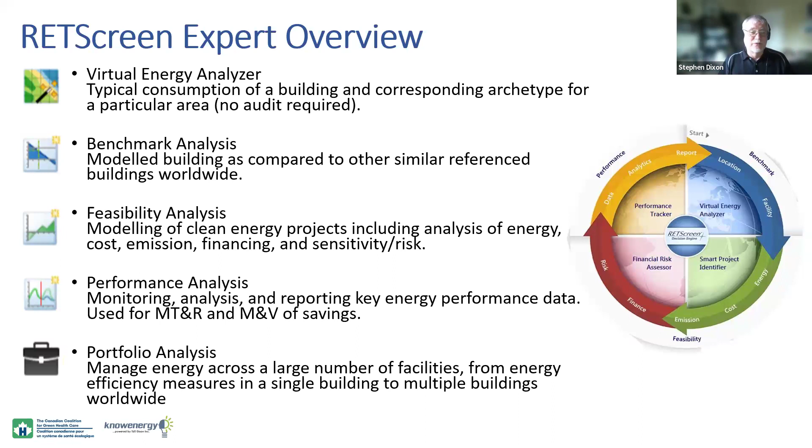So to engage the staff in the process, allow the staff to see the benefits of what they're contributing to. So I think that's really important. And she'll explain to you how they're approaching energy management strategically in their organization. As I said before, the portfolio, if you have more than one building, a collection of buildings, it could be just a portfolio of projects within a building too. So there's many ways to use that portfolio piece.

You can use basically RETScreen to do project types, everything listed on the screen. I'm not going to read all these things. You can read these later. You'll get a copy of the slides. You'll see the recording. But you can even use it to decide whether you're going to...

Somebody said to me the other day, I've got a used car for sale. It's a hybrid, and so I sat down with RETScreen, put the used car in as the proposed case. I put in my existing used car as the base case, and I evaluated whether it made sense from a fuel efficiency perspective. It took me 5 minutes in the transportation model of RETScreen to decide whether or not to buy this other car from a fuel efficiency perspective. You can use it for many things like that.

RETScreen has embedded databases. So if I'm sitting there thinking, oh, I want to put this photovoltaic system on the roof of this small clinic over here, and I wonder what it would cost to put those particular panels on. Do I have to call a supplier? No, I can click a button. It's the little shopping cart here at the top, and it actually has information about products that I may put on there.

And the dollar sign, I click another button, it gives me an idea of what the rough installed cost might be for that particular item that I chose. So I can actually begin to analyze a complete project without ever leaving my desk. Now, does that mean that's all you have to do? No, but you can refine those numbers going forward.

Depending on where you are in the world, you may need weather and climate data. RETScreen has a ton of that. Weather data is what's happening today, tomorrow, and yesterday, and further back in the past. Climate data is the long-term averages, and they're used differently in RETScreen. I'll point that out. If you happen to be into water power, there is a hydrology database. There's lots of project data.

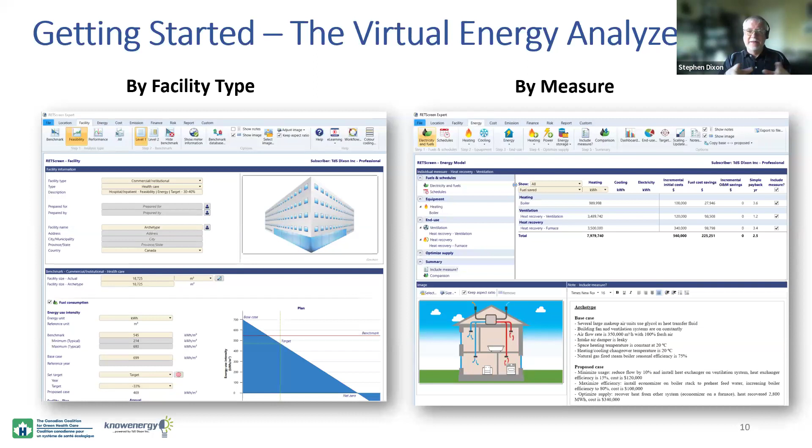But at the end of the day, you've got access to a lot of folks like myself who've built these things. There's literally hundreds of facility archetypes, different types of facilities or measures. One that I could have put on this slide, I think this one's about ventilation control, heat recovery, and ventilation. But there could be one on steam traps. I'll actually show you how we get to that one in the virtual energy analyzer. All right.

Let's take a tour of a couple of the archetypes. I'm definitely going to show you the hospital inpatient 30 to 40% energy archetype and the clinic outpatient 80 to 90% archetype. And if anybody wants to ask a question, could RETScreen analyze this situation? Put it in the Q&A and I'll see whether we can find that in the archetypes. So let's jump over there right now.

All right. So after the workshop, you're going to give this a try. So you download RETScreen. You basically install your 30-day license. There's a couple ways to do that. You can just go over here to the subscribe, and down the bottom here it says add a software key. So Autumn will email you a software key. You can just load it in here, or the other way I like to do it is just stick the software key on my desktop, double click it, opens up RETScreen, says you're now licensed for 30 days, right? So one way or the other, you're going to get to this interface. And my suggestion is, the first time through, click on the virtual energy analyzer.

All right, so because many of the measures depend on the conditions outside, right? Temperatures, wind speeds, sunshine, all that kind of stuff. We can actually have RETScreen set up these samples that we're going to look at, these archetypes, at a particular location. So Autumn, you're out in the west part of the country. So I'm going to take my location pin here, and I'm going to stick it down. I'm not sure exactly where you're at. I don't need to precisely know, but I'm going to say, okay, maybe you're out in Coquitlam, right? So there we go, Coquitlam, BC. So that's where it's going to build this project.

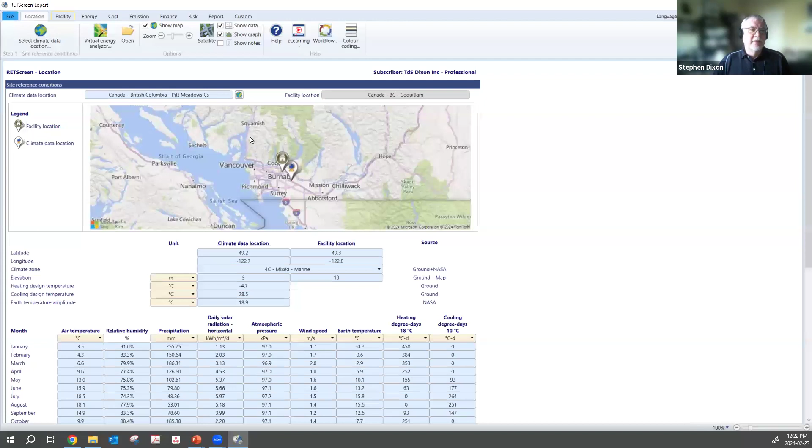All right, so RETScreen has gone and got this building ready. This is the climate data. This is the long-term average data it's going to use to do the calculations where it needs outside conditions, right? And we go over to facility. Here we see a bit of information about the facility. There's a sample picture. Now, if you wanted to make this archetype look like your building, there's a couple things you can do. One thing you can actually do is to change the picture, right?

So RETScreen is very customizable throughout various different aspects. So you can put pictures in. Maybe as you're working with this archetype, you want to make some notes about how this building differs from yours. So you can actually have notes in here. So throughout RETScreen, there's lots of places to put your own input in, whether you're building a building from scratch or whether you're actually just using one of the archetypes. And there we go. Okay.

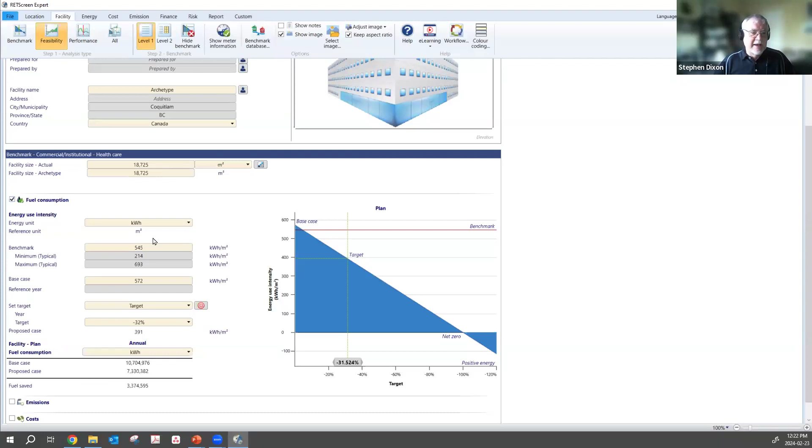So the basic information here is what we call benchmarking information, right? So we put in our floor area, and then basically we have what we call our base case, the way it is now, energy consumption, and our proposed case energy consumption, and then we look at our targets with respect to that. So the benchmark for this kind of facility would be 545 kilowatt hours per meter squared.

Now, if you go, well, what is that in square foot? I can just go up here and change this specify to square foot, and that's 50.6 kilowatt hours per square foot. Right. So I remember a hospital years ago I was working with, that's where they ended up after 3 years of work. So things are always improving. The range is 19 to 64. That's a pretty wide range. The typical number in the center of the range is about 50.6. So RETScreen is actually very good at dealing with units. You can mix and match units as you go.

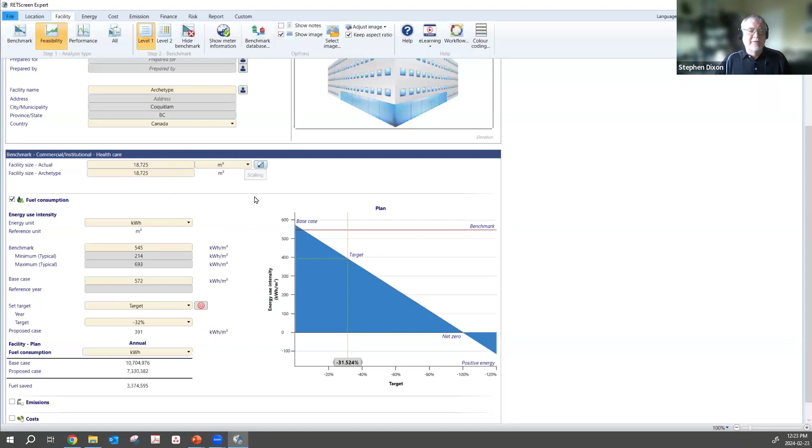The other thing you can do is you can actually scale these archetypes to your building size, right? So you can go in here and you can, in fact, click a button here, and RETScreen will give you the ability to adjust this building to your size of building, and it'll adjust all the numbers underneath. Pretty neat little tool. We're just going to leave it at the default size right now, but you do have that ability to scale your building, and you can scale it based on floor area or as a percentage. I want to be 50% bigger, something like that. All right. So that's the benchmarking piece.

And RETScreen actually does allow you to benchmark, oh, sorry, I hid the benchmarks there. RETScreen has two ways of benchmarking: overall energy consumption, or it allows you to benchmark on the basis of your kilowatt hours of electricity and your cubic meters of natural gas or whatever other fuel you use in that building. So you're not just stuck with natural gas. You can select many different fuels. It knows about the energy content of many fuels. So in fact, that's how we built what we talked about earlier, the level 1 benchmarking, which is the overall benchmarking. We just started with this number of equivalent kilowatt hours.

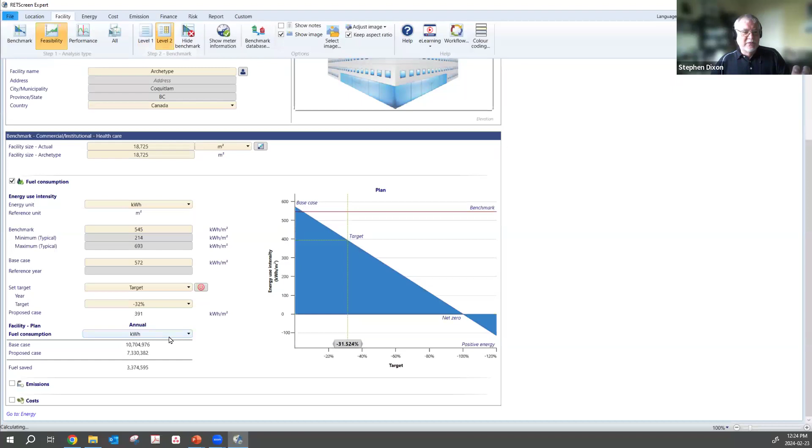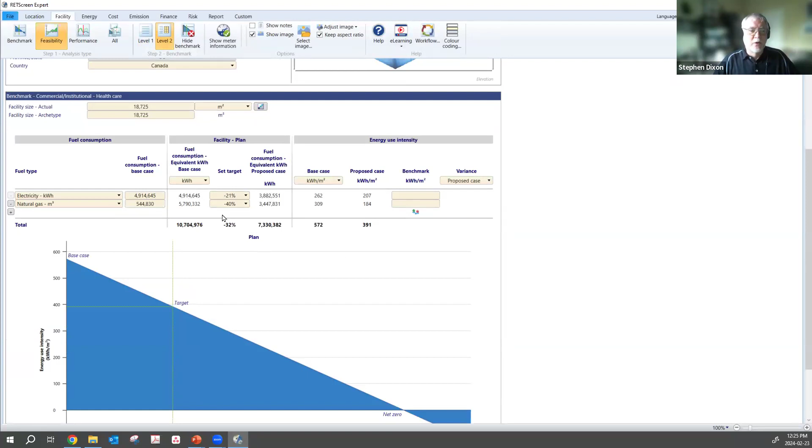We could go in here and we can say, well, we use this much gas, this much electricity. We have a target of reducing those by this amount, and that will give us then the total energy consumption in the base case, the way it is today, and the proposed case, after we do all the things in this archetype, the way it will be. Right. So in this case, the goal was to reduce by 32%. We'll see where they got to in this situation. So that's different levels of benchmarking, in addition to what you could or would otherwise be doing in Portfolio Manager as a companion tool. All right.

So let's take a look now at the energy tab here, because this is where we see the details of the building, right? So this is an entire building, all the systems and equipment. Here we have the space heating, boilers, we have kitchen equipment, domestic hot water. Heating equipment converts fuel to energy that we can use in the building.

Cooling equipment converts electricity, in most cases, to cooling resources that we can use in the building, right? We have a building envelope. We can specify what the building looks like from the outside. And you go, well, my hospital's a lot bigger. It's got so many different wings and sections and facings and facades and all that stuff. I couldn't fit that into one of these things.

Not a problem. Because when you build your building in RETScreen, you can add as many building envelope elements as you want. I could simply go in here and add another one right now. So I can say, okay, I'm going to add another building envelope element, and that should go into my list here. There we go. It should come up there now. So I now have a blank building envelope element that I can use and specify for whatever else.

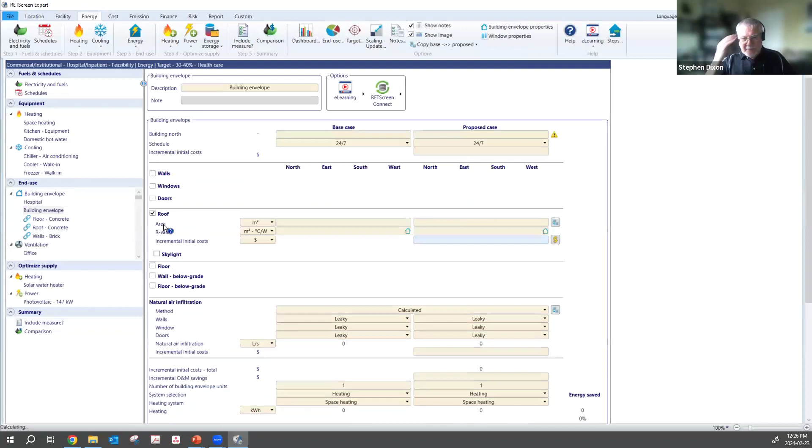Maybe I just want to put a roof in there. Maybe I just want to analyze the heat loss through the roof. I'm going to show you that, tell you a story about that one later on. So you can use the whole building envelope or just part of it, right? So very flexible tool when it comes to doing that. If I don't want that building envelope element, I'm going to simply remove that one to keep my file nice and neat, right? So we're going to remove that one.

There we go. Now, I'm going to go back to what we typically call the include screen, which is where we see everything that's included in the building. And here we go, right? Look at that building. I'm not going to go through all these things, but somebody has spent a lot of time, and this is based on real experience in doing audits and analyzing and working with these types of buildings.

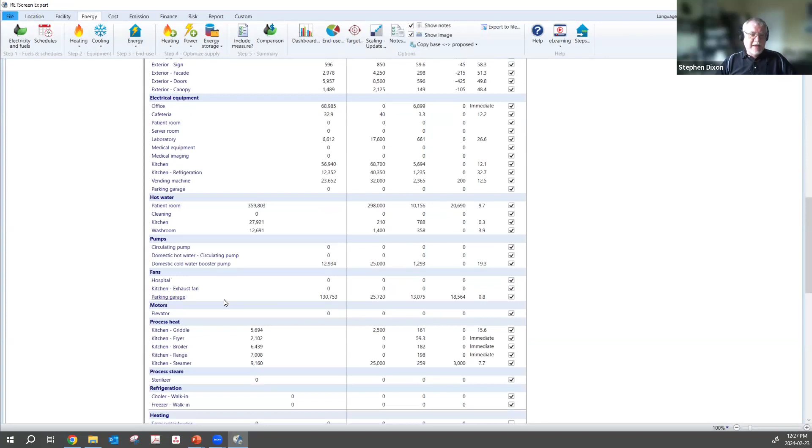The lighting systems, all the electrical equipment, including like medical equipment, medical imaging, patient room equipment, kitchen equipment, it's all there. Hot water, so hot water for patient room cleaning, kitchen, washrooms, right? I don't think I see a laundry here, so I assume that maybe the laundry is contracted out in this particular example. So we've got pumps. So where are the pumps in the building? Cold water pumps, heating pumps, and so on. Fans, right? We've got elevator motors, we've got process heating, and so on. And all the way up to and including things like solar water heaters.

Now, in this particular model, the solar water heater is turned off, as is the photovoltaic panel. In order to get to the 30 to 40% energy, we didn't need those things. But we'll see when we look at the low carbon archetype, we're probably going to need those things, so they'll end up being turned on. So that's, in a nutshell, an archetype. What we can see from this is we move across the top, the results, right? Here we see a summary of the costs and the savings.

Now, if you want to use RETScreen as a project management tool, under the costing feature here, you can actually enter a lot more information than just summary information, right? So we have a very detailed costing tool where we can go in and do some almost exhaustive project management and costing functions as well. And it's not just first costs, it can deal with periodic costs going down the road, because ultimately, when we do our financial analysis, we have the ability to do basically present value analysis, which takes into account maybe there's some costs down the road that we have to deal with. We have to refit some of these systems to keep them delivering the results that we're after.

So we do have a nice financial calculator here, and I mentioned it before, a risk analyzer. So if you've got a big project and you want to look at the sensitivity of the net present value, which is the financial indicator you're looking at, to say first cost, initial cost, O&M, or debt ratio, if you're borrowing some money, maybe it's part of a shared savings project, you can do that kind of analysis. You can also look at the likely outcomes of this project.

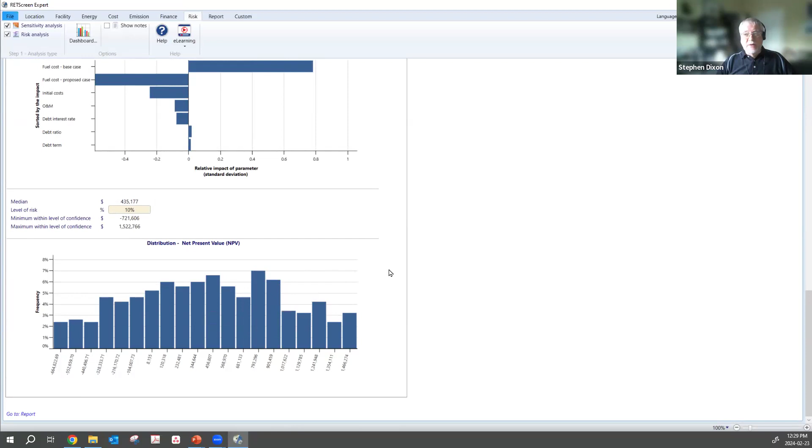This thing involves what's called a Monte Carlo simulation. Right now, it's only doing 500 iterations, but it could do 5,000 random iterations of the parameters we put in here and give us an idea of the likely outcome, right? Because nothing is ever precise in this world. So it deals with the uncertainty and allows us to manage risk by understanding the uncertainty around what the project outcomes could be.

And then eventually, if I move over to emissions, and I left that one to last, here we see the emission reduction. So even though I said this archetype was designed to get 30 to 40% energy reduction, what's present here at this location would yield almost a 40% reduction in carbon. And you'll see that as equivalences. So maybe you're not interested in cars, maybe you're interested in how many acres or hectares of forest absorbing carbon. So this project is equivalent to 434 tons of CO2, which is almost 100 acres of forest absorbing carbon from the atmosphere. So some neat little tools like that.

And it is sensitive to the amount of carbon in the grid in different parts of the country. So that's the 30 to 40% energy archetype. Let's go back now, we can simply go back to our home screen and jump over. And this time I'm going to have a look at the clinic, the 80 to 90% reduction in carbon or emissions, clinic outpatient type of building. All right, we're going to leave it at the same location and hit go ahead.

It says you made some changes, do you want to save those? No. RETScreen's really good at you not losing data. I honestly can say I've never lost data because of RETScreen. Now, if I answer that question incorrectly, that's my fault, and I have lost data that way, but it's not because the program was unstable. And even if you turned your computer off in the middle of something, there's a feature, and I have it set to 5 minutes, that saves automatically every 5 minutes, and when it comes back up it says, I found something you saved up to 5 minutes ago. I've had one situation on a desktop computer where the plug got kicked out, but RETScreen rescued me.

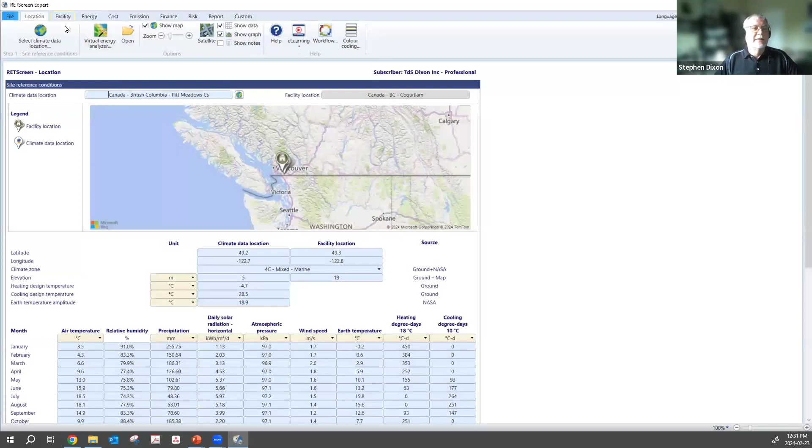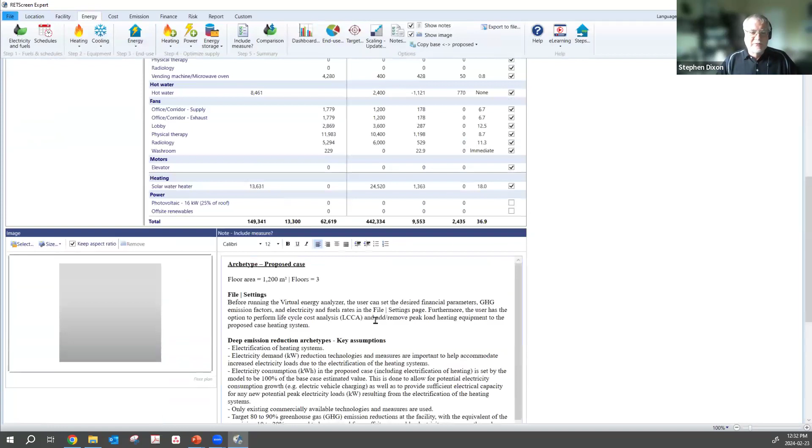Okay, so let's have a look at this one. This is the archetype that's going to be very aggressive, 80 to 90% reduction in carbon emissions, what I call low carbon. I'm going to jump over to the energy tab and scroll down, because in each of these archetypes there is a descriptive field, part of the notes section, which talks about how they constructed this archetype. It talks about the electrification of heating systems. And it takes into account the carbon in the grid at the location. So if we took this building from BC and put it in Alberta or Nova Scotia, where the carbon in the grid is a lot different, it will make different decisions.

So it determines whether we need to go with a boiler, an air source heat pump, or a ground source heat pump. An electric boiler is 100% efficient. The air source heat pump has a COP of say 2.5 on a seasonal basis, that's like 250% efficiency. Maybe we can get a COP of 3.7 out of the ground source heat pump, and we might need to do that depending on where we are to get the carbon numbers down. I'm not going to read all this. It also tells us how it's going to integrate rooftop and off-rooftop PV. So this is not just stored information in a file; it's actually making real concrete decisions, and you can read through those things.

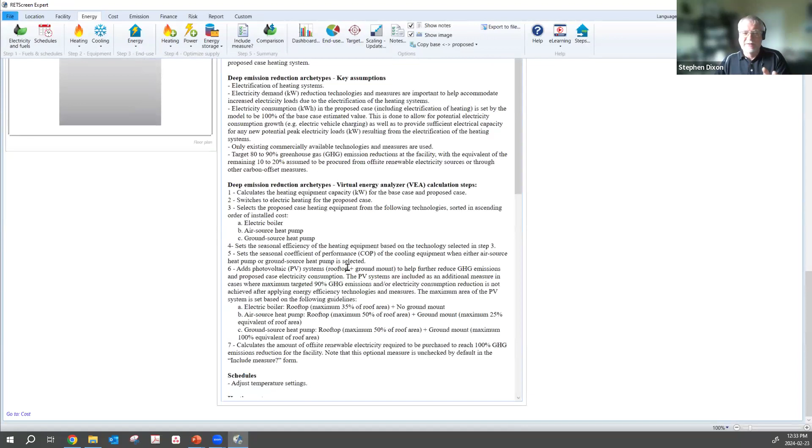There's also, I believe, some documentation about the actual logic, but most of the logic is described there. So when you open one of these, check that section to understand how it's coming up with this archetype. This is very similar to what we had before, but the difference is that here we're getting to 92.3% carbon reduction, which is what we were going for, at least 80 to 90%. It does have the financial engine, but we'll notice that to get to low carbon in this circumstance, there isn't actually a simple payback. That's a long-term investment. We've got a 20-year time horizon.

If we went longer, this thing would probably eventually break even. But right, if you're going to low carbon with the aggressive measures you have to do, it's definitely not something you can evaluate with simple payback. But life cycle costing, which is essentially what this is, is the right way to look at that type of investment, and it is an investment in the future.

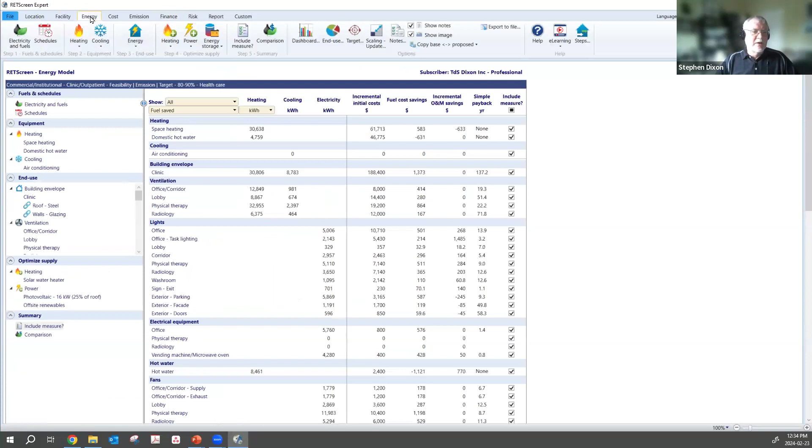There's little questions. What I want to do now is jump quickly and just show you, and it's probably relevant to healthcare, definitely with steam. What if I want to justify steam traps, right? I'm going to go out here, to the virtual energy analyzer. I'm going to click in to, in this case, individual measure, all right? So remember that, individual measure, because you can explore a bunch of measures.

Okay, and then I'm going to move my way down, and hopefully I'm going to find some steam here. So I have steam losses, right? That's what I'm going to go after, because a steam trap, if it's leaking, represents a steam loss. So now what I can do is, okay, steam traps repair. Well, let's see what this project looks like. So again, I'm going to put the project in Coquitlam, although it's probably not relevant to this particular archetype. So let's see what this comes up with for me.

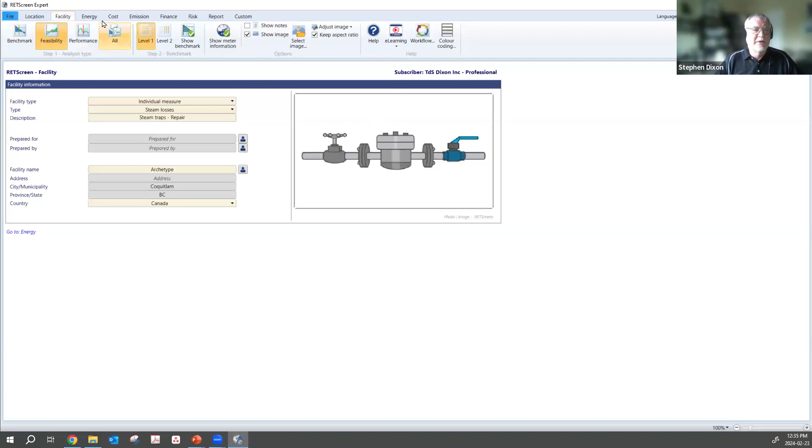All right, facility. So there's a picture of a steam trap, right? Under energy, we go into energy. We have the description here, right? And so we have two options here. Steam traps connected to condensate return, which doesn't represent an opportunity, or we have steam traps, or it might do. Let's just see. I'm going to turn the savings measure on.

So in fact, yeah, the savings measure is different depending on whether we're returning condensate or not, because obviously the steam trap's leaking. Some of the steam that goes past it could eventually become condensate and be recovered back in the system. But when we're dumping the condensate and the steam trap's leaking basically to drain, then that's a complete loss.

Now you'll notice here, we have options, and those options are selected by what they call the include measure function, and that exists in all of the archetypes. So maybe I don't want all the projects in those big long lists of archetypes in that clinic. I can turn off certain things that I don't want to see in that particular project. All right, so let's have a look at how it does this.

So what this is is a steam leak, 7.5 millimeters, right? How big is that? Well, it's about a quarter of an inch, right? So what is a quarter of an inch steam leak at, well, it says 15 bar. How many PSI is that? It's 202 PSIG, right? And we're talking about basically saturated steam, so not superheated steam. And the steam is leaking for 5,400 hours a year, so basically most of the heating season.

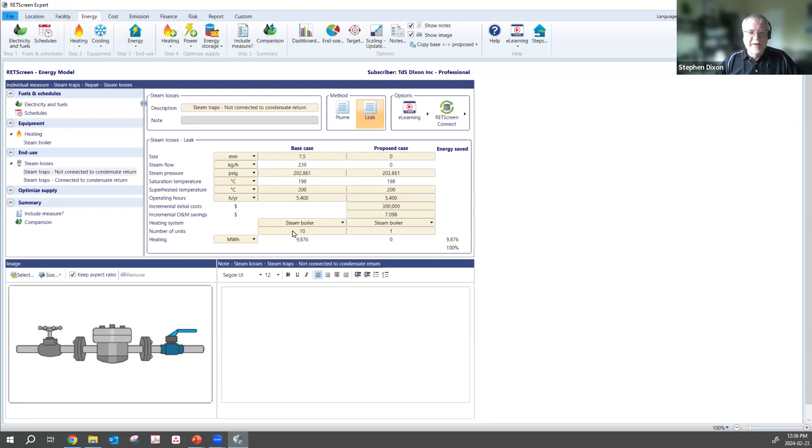So it tells us the amount of energy, but what's interesting here is when we go out here, that's worth, holy mackerel, $38,720. Wait a second, oh, there's 10 steam traps. So one steam trap leaking like that, we'll go back in here, is worth about $3,800. I always say that if there's something that's worth doing, it's worth putting numbers on it, right? Or maybe if you put numbers on something, it may become visible that it's worth doing.

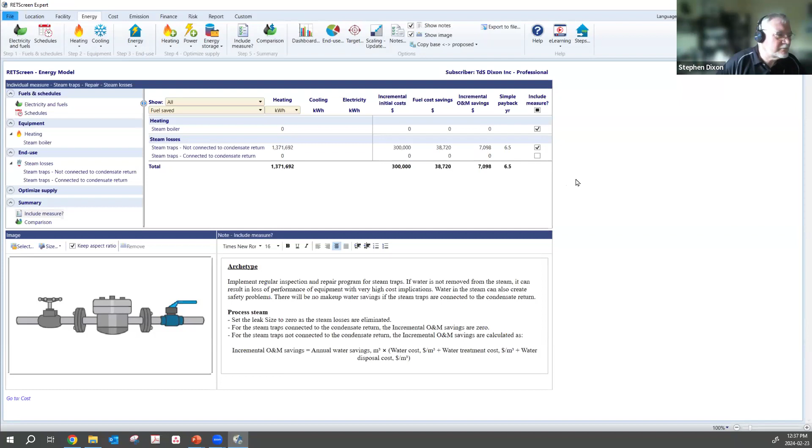So even something as simple as a steam trap or any kind of leak, there's many things you can evaluate in RETScreen. You can look at a whole facility, as I did, or you can look at a very specific measure. I'll take a look at a few more specific measures in the next segment. Not seeing any questions there, so I'll just put RETScreen aside for a moment. So that was looking at the archetypes. And again, the first time you look at RETScreen, explore it with the archetypes.

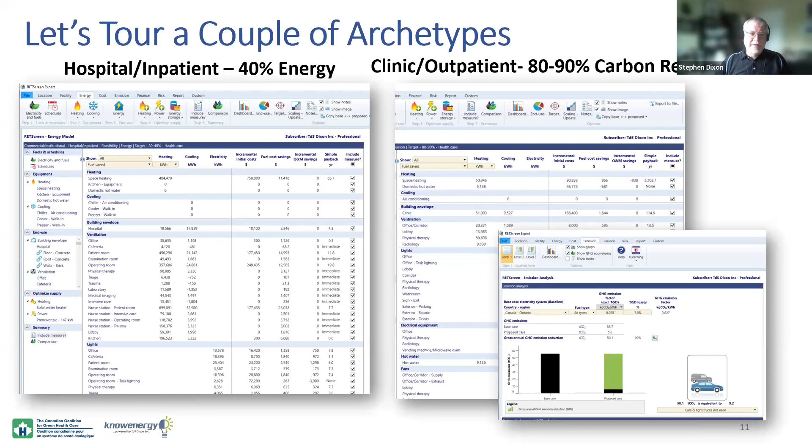The other thing you can do, if you're interested, and this is particularly interesting as well, is you can explore it using these case studies and templates down here. So at the top of this column, it's virtual energy analyzer. Those are the archetypes. Have a look at projects, buildings, whatever, or case studies and templates, right? So let's say I was specifically interested in steam. Any template or case study which is related to steam would come up here, right?

So here we see a number of those. May not be relevant to my situation. Well, here it is. Here's the template, process steam in a sterilizer. That is relevant to a hospital. Well, let's take a look at the template. So when we open that up, it talks about essentially that project. So if that project is something of interest to you, it looks like making some changes to the sterilizer, right, to improve its steam efficiency.

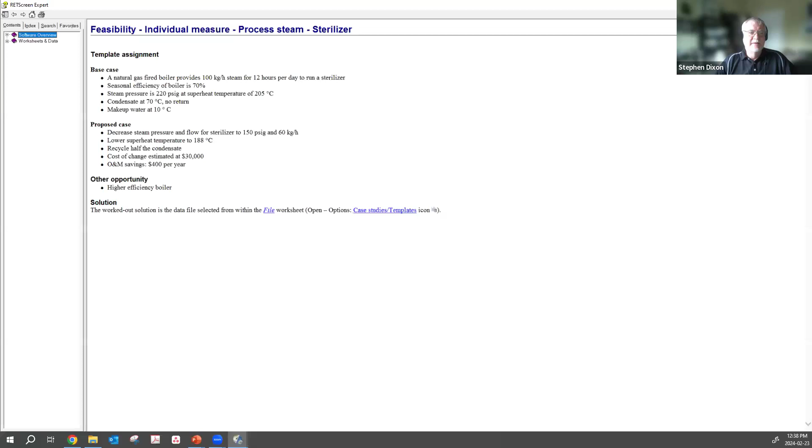So how does RETScreen analyze that? There you go. There's a project. So you can click on the blue thing to see the project, the descriptive piece. If you double click, it'll open up that project and show you the answer or the whole project. All right. So case studies and templates from the home page in RETScreen, if you click on home, are a good source of examples as well.

All right. Move forward. I'm going to kind of go rapid fire here through a bunch of things because I want to make sure we have enough time at the end to let Kate talk about what they've done in the healthcare in New Brunswick. So if you're doing something as simple, and many people have done all these things, as doing a lighting retrofit, there's a nice little lighting analyzer. Not a zonal cavity calculator, which is a much more detailed lighting calculation, but it does allow you to take into account the light levels that you require and making sure that you don't modify that.

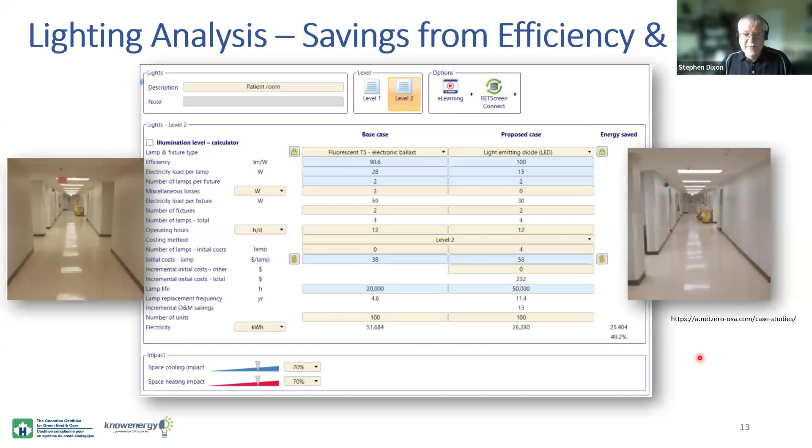It's interesting. I remember one gentleman who some of you probably know, JJ Knott, and he told me about what they discovered improving the paint that was used in patient rooms. Changing the paint to one that had less propensity to harbor bacteria, he also discovered that it actually had greater reflective properties. And so painting the room had the dual benefit of being able to reduce the amount of light you had to put in the room with the electricity, and now you had a better paint from a medical perspective as well. So you can't analyze that in RETScreen, but if you discover you need 16% less energy, you could analyze that. All right.

Schedules and temperatures. I work with a gentleman named Michel Perron, who does lots of audits in hospitals and recommissioning of facilities of any kind, including hospitals. And one of the things we still discover today is there's still opportunities to work on those schedules and temperatures, right? Simple ways to eliminate unnecessary energy use.

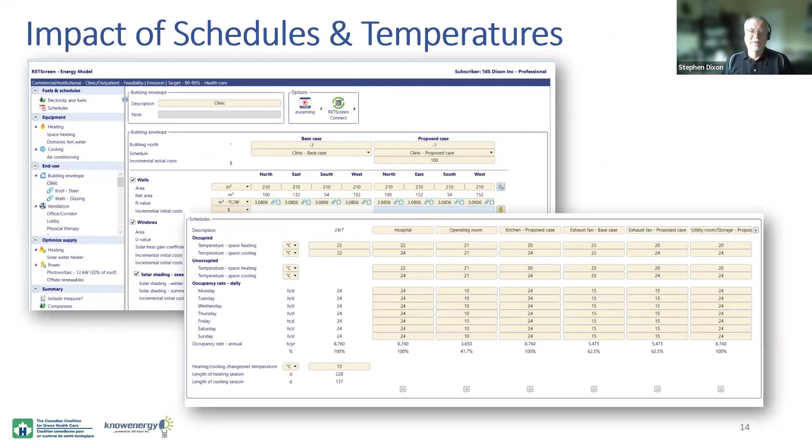Maybe we're looking at doing an upgrade of an HVAC system, maybe in a physiotherapy or physical therapy area, a rooftop unit. Maybe we're looking at replacing it. Can we replace it with heat recovery, right? So here we have a situation where we're looking at a 60% efficient heat recovery unit. And we can also take into account replacing that rooftop unit, tightening of the dampers, putting in better low leakage dampers, and the overall savings, which is around 70%. And that particular project is actually taken out of one of the low carbon archetypes we just looked at.

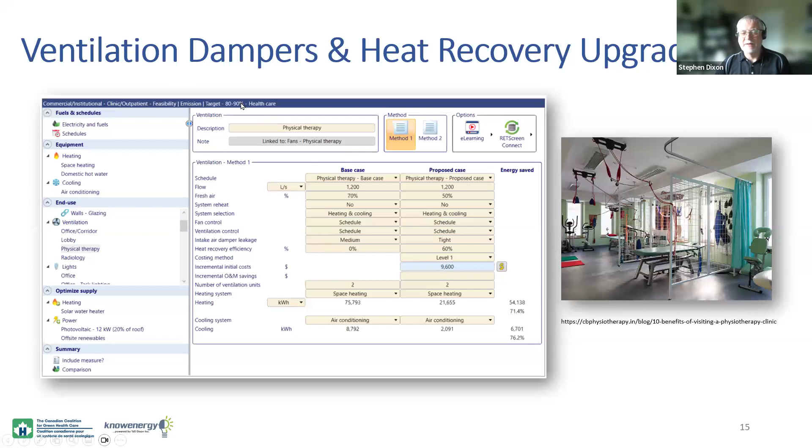This is an interesting story. I was doing a workshop like this, and if I had more time, I would open up RETScreen and go through this. I'm going to show you the result. But the story goes, I'm doing a workshop. Gentleman in the back of the room says, Steve, you're talking about this fancy tool called RETScreen. My contractor that's replacing the roof on the left wing of our long-term care home tells me that roof will accommodate another 2 inches beyond what I've asked him to install. So nominally they were going to go with R10. This was 15 years ago now, right?

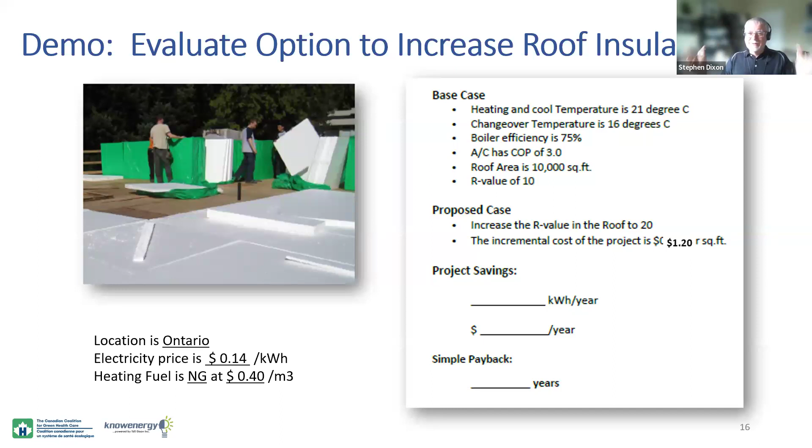He said, but he can do R20, and he's only going to charge me $1.20 a square foot to go the additional R10 on the roof. Can you analyze that with your fancy program called RETScreen? I said, absolutely, I can do that. So I jumped into RETScreen and I put a quick boiler, put air conditioning in, did the building envelope, looked at just the roof going from R10 to R20, put in $12,000 as the cost on 10,000 square feet. Turns out that the simple payback was 8.6 years.

And it would reduce carbon, right, in that situation by 5.4 tons of CO2. Well, he liked the carbon piece, but he said, well, you know what? That roof's going to be there for 20 years, right? So we said, that's probably reasonable.

I said, well, tell you what, why don't we go back and dial in? I think I told him to go down to 80 cents a square foot because the chances are the contractor's sitting there with the insulation on the truck anyway, right? So I said, yeah, you're going to drop your payback down to about 5 years at 80 cents a square foot. He called him back. He said, can you do it for 80 cents a square foot?

The guy goes, done. So there's energy management in the moment using a decision support tool like RETScreen, because I wouldn't have known off the top of my head how much that was going to save. I would have no idea. I did the calculation. If I had answered the question without doing the calculation, I probably would have given him the wrong answer, and that's not a good thing.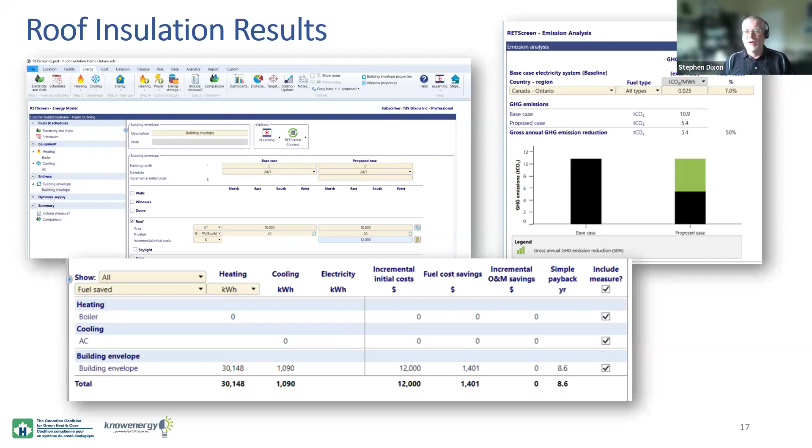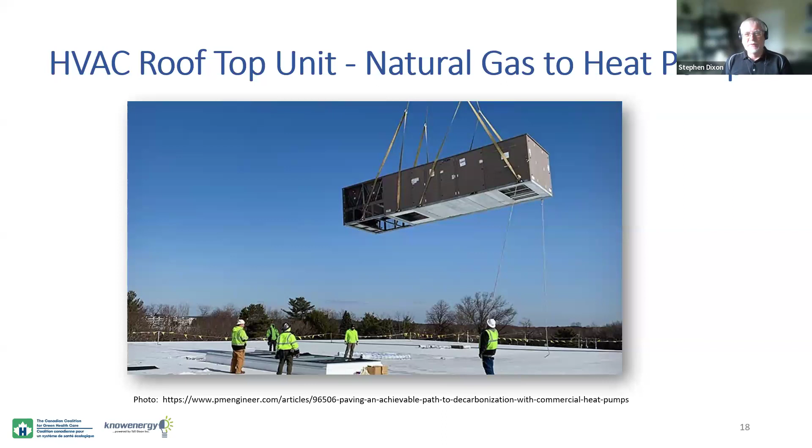All right. Today, many people are looking at replacing rooftop units, right? Moving from natural gas-fired rooftop units, moving to heat pump powered units. And RETScreen has the tools to do that too. You can build a hybrid system, right? Maybe you don't replace all the capacity, and this is something a lot of people are doing at home. Some are going full heat pumps. Some of them are putting in a hybrid system, gas and electric, right?

Now, I know Kate's sitting here thinking, well, if you've got an oil-fired piece of equipment in a home in New Brunswick, it's a slam dunk to go to a heat pump, and it is, right? But here in Ontario, and maybe other provinces where we have gas availability, it's not necessarily a slam dunk to go to that heat pump quite yet. It is from a carbon perspective, but the challenge is we have to balance the cost and the carbon piece. So RETScreen has the tools to do that.

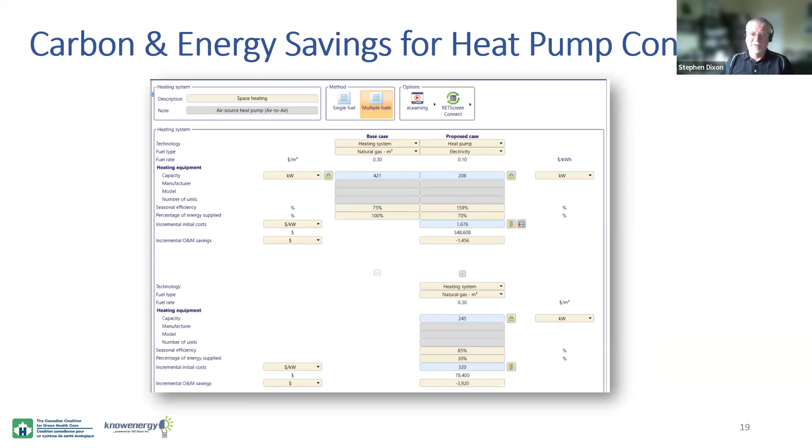It allows me to actually configure a hybrid system, and even allows me to size the system. I'm not going to go into the details right now. If you want, I'd be happy to take you through this module. You can send me an email, say, Steve, show me how to look at my house and change to a heat pump from gas heating, right? And there's some pretty neat little tools in here to do that.

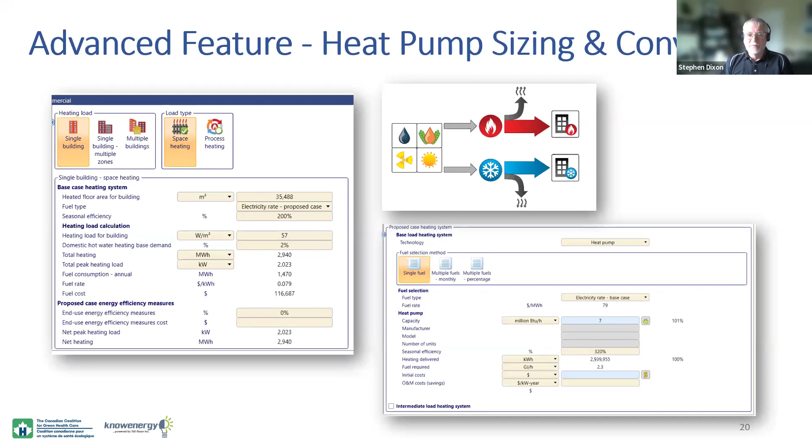It's a very obscure part of RETScreen. Even people that use RETScreen all the time are not aware of this tool. So if you're a longtime RETScreen user, make sure you take a look at the power, heating, cooling module and see how there's some examples in the template of how to use RETScreen to size up a residential, or even, we've done it for small clinics, we've done it for fire halls, a small rooftop-based heat pump system. So neat little tools that maybe you weren't aware of.

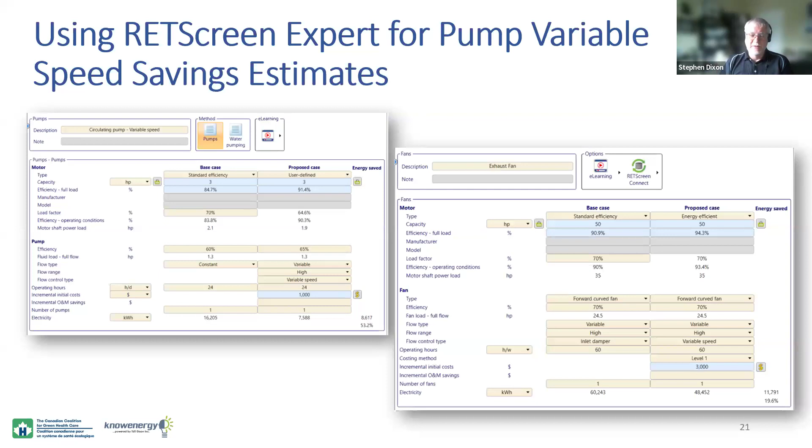Looking at a variable speed drive on a fan or a pump, right? So maybe we're refitting that HVAC system, and we've got inlet guide vanes today. And maybe what we want to do is look at the opportunity to put a drive on it. Most times that's going to happen anyway today, in my experience, but you can always justify that case using a tool like RETScreen. It just adds to the savings, and it's always good to be aware of those savings.

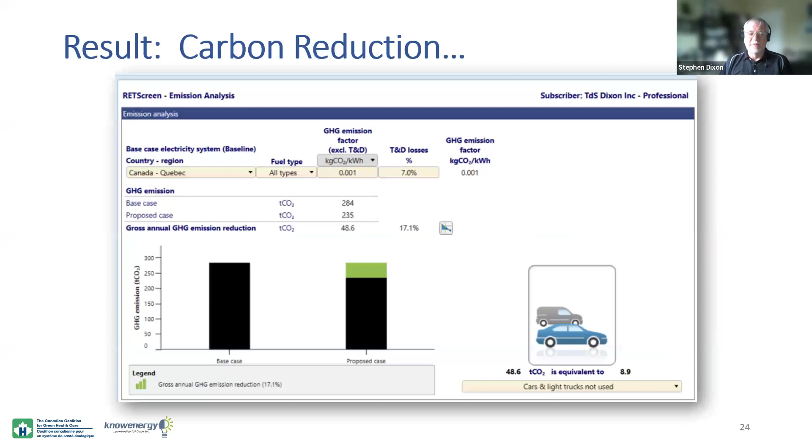We can eliminate the ones with a longer payback or the lower return and come up with a basket of opportunities that meet our financial criteria, that deliver a certain amount of carbon reduction, right? And we can do that life cycle costing on the financial side of it to develop good indicators like net present value, benefit to cost ratio, internal rate of return. All those functions are in there.

So, just to show you very quickly, a few years ago I did a seminar like this where I said, what could you do with RETScreen on the renewable side? So looking at PV. So these were real projects.

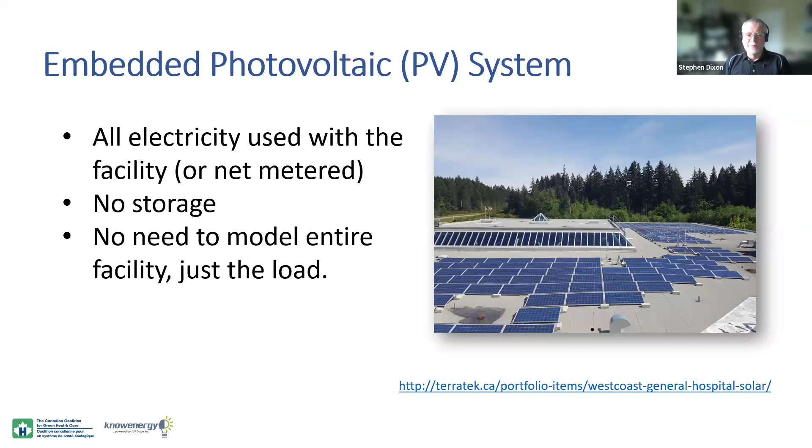So actually, if you take a look at them, this is from BC, obviously, a real project in a hospital, and I analyzed that with RETScreen, right? So they weren't done with RETScreen to begin with. Well, they might have been, but I wasn't aware of it. What I did was I took the case studies and said, hey, listen, I can use RETScreen to look at these just as a demonstration of what you could do, right?

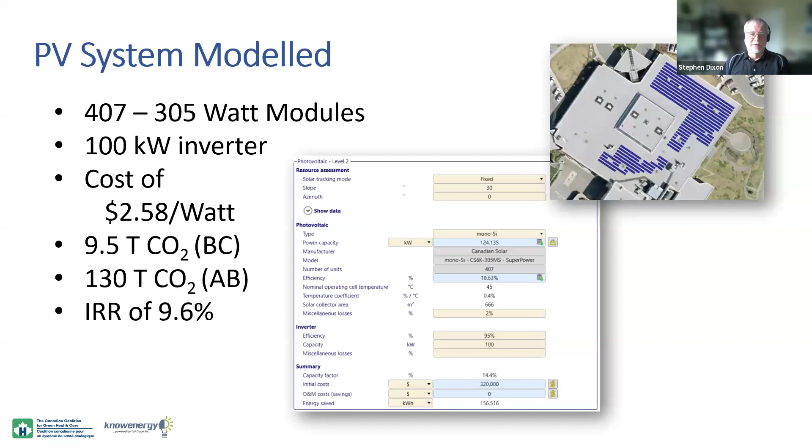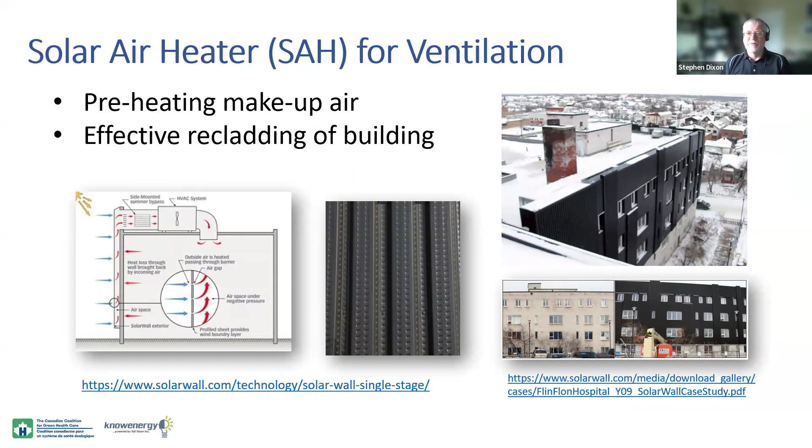So I could calculate the energy, the carbon, the cost, and then ultimately the internal rate of return for each of these projects, right? Up in Flin Flon, looking at recladding of the hospital in order to improve the facade look, but also putting a solar wall on there, which heats incoming air for makeup air into the building, right? So combining an architectural upgrade with an energy upgrade. And you can analyze that with RETScreen.

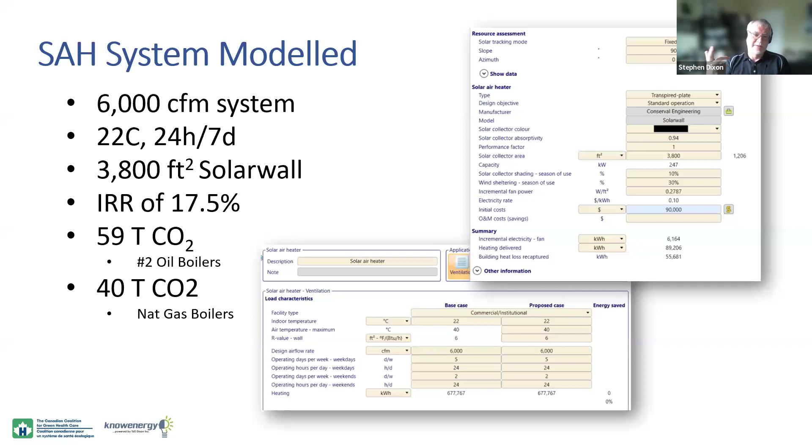In this case, they were using #2 oil boilers, which are particularly consumptive or emissive, I guess, on the carbon side of it. Even if you've got a geothermal heat pump system you're looking at, you can definitely analyze that in RETScreen as well. That actually uses the power heating cooling model that I looked at a bit earlier.

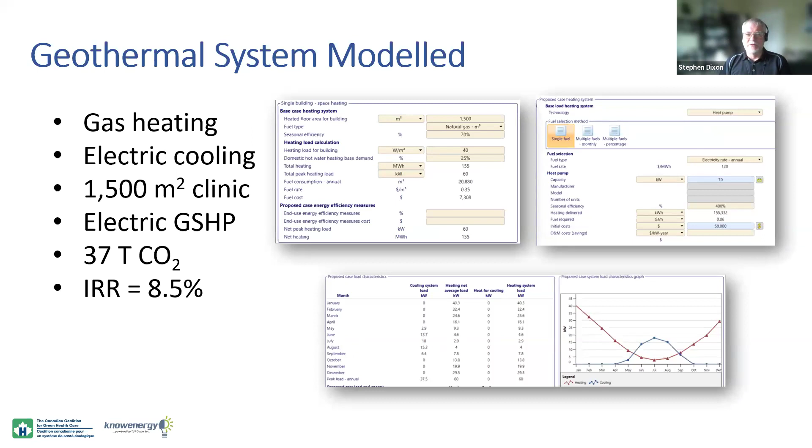If anybody's interested in these 3 projects, I'd be happy to share the RETScreen file that I used on those just as examples. You could probably go through and find a project similar to it in the case study templates or the archetypes, but I'd be happy to share these particular ones. They're just based upon publicly available case studies that were out there.

All right, so performance analysis. So we talked about feasibility, right? Feasibility is where you go, I'm going to take this, I'm going to change it to that. And the virtual energy analyzer is built around making as much of that available to you as possible. Performance analysis is about tracking improvement, right, and other changes in performance.

I had an example years ago where we looked at a hospital. They had no idea what they'd saved through an economizer, but they also didn't realize that they'd lost a lot of the savings because when they maintained the economizer at some point after it was put in, they forgot to put it back into process properly, and for a couple of months they weren't getting any savings out of it. So good performance analysis will avoid that kind of thing.

Kate's going to talk about a thing called a CUSUM. That's very much in her vocabulary. A CUSUM, in very simple terms, is just like a financial person would do. It's called the cumulative sum of the difference between your expected consumption and your actual consumption, right? And we use a performance model behind that as a relationship between, say, energy and weather and clinical activity and people in the hospital, all those kinds of things.

So we have a model which represents the performance of the building. We model what would happen, right? If we took an action, we model what would happen if we didn't take an action. We take the difference between that and what actually occurred, and then we sum the difference, right? And that's what we call a CUSUM.

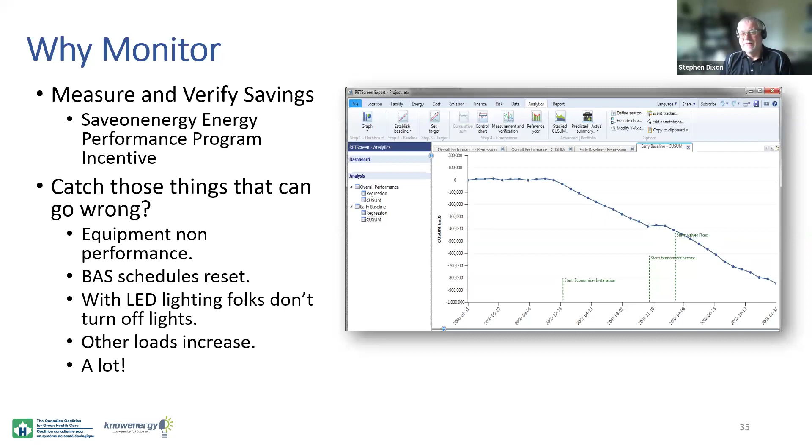So take readings weekly, and a lot of data is available to do that. RETScreen can work with daily data. Why wait until the end of the year to discover you made a mistake when you can't do anything? Catch it earlier. And Kate will talk about that one. So RETScreen actually is very adept at doing this.

You know, you can basically start with a spreadsheet full of data, develop a performance model, we call it regression analysis, and then generate this thing called a CUSUM. And there is a whole series of videos. I think I narrate one, which is 15 videos, 3 to 4 minutes each, that goes through all these steps on the RETScreen website.

I also like to look at meter data, so I can connect RETScreen to many other sources. This is actually my own house, connected through a very simple monitoring system called Eyedro, which is all part of the RETScreen Connect suite of connections between RETScreen and the outside world, right? So now we're connecting RETScreen to databases and physical monitoring equipment. Now it comes to life, right? And I actually monitor my own house with this tool.

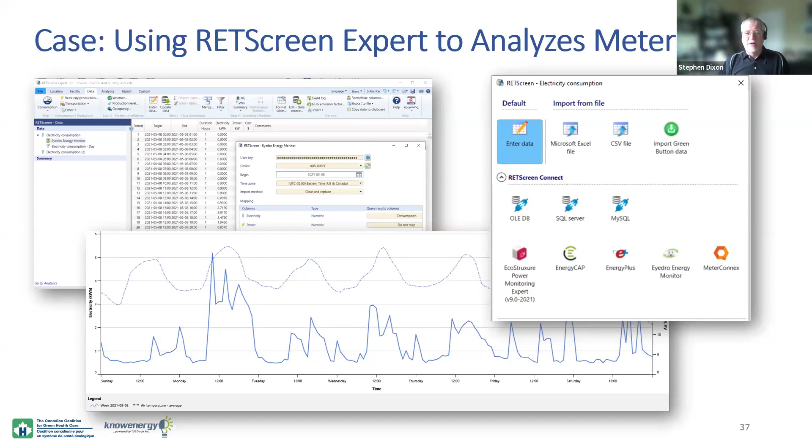I can do some beautiful graphs like the one on the top there on the right. I like it's a weekly graph. I can march through the weeks. I can overlay the weather. I can see Sunday, Monday, Tuesday, Wednesday. I can compare weeks, and then I can do the whole year right in one glance. So that's every 15 minutes, right? Every row going down the page is 1 week, and every little pixel across is 15 minutes. So I can see the whole year in a glance on those two views.

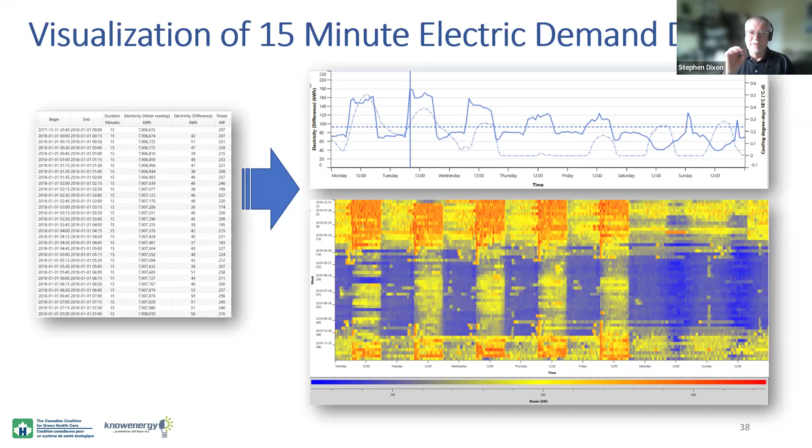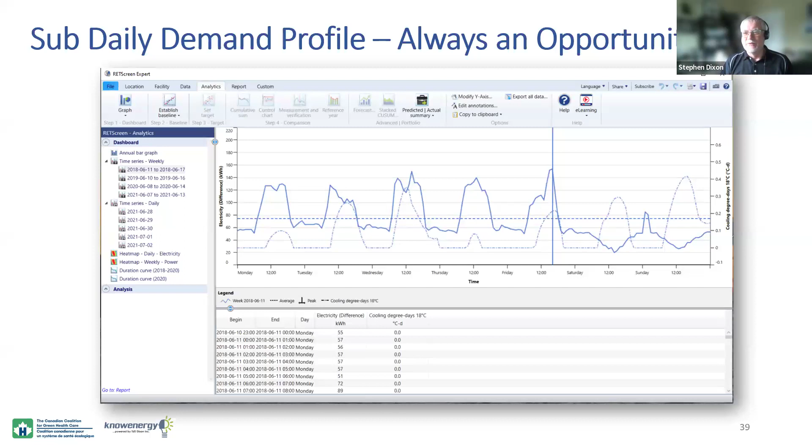You can get to those two graphs once you've got the data in there, which might take you 10 minutes. You can get to those probably in about 2 minutes. So it's very good at allowing you to visualize what's happening. We found malfunctioning controls in a building by going down and looking at this. Like a doctor uses things like EKGs to examine performance of your heart, I like to say the demand profile is the EKG for your building. It allows you to see things that you wouldn't otherwise be able to see.

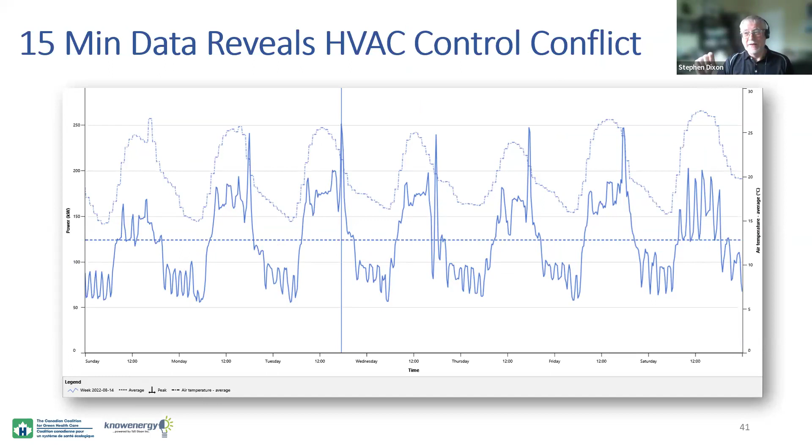All that cycling, what is that? That's a malfunctioning compressor control, right? Here we have heating, cooling controls, right? When the temperatures in an office area were set up at the end of the afternoon this summer, the electric heat kicked in to drive the temperature up and drive the demand through the roof. They had no idea until we generated this graph what was going on. That led to a whole lot of recommissioning projects in that particular area of offices.

We also look at gas data this way as well. We get hourly gas data and start to analyze it. Here, the situation was we had, again, malfunctioning boiler controls that were actually bringing 2 and 3 boilers on, even in the warm months of the year when they really weren't necessary. But nobody really saw it when you're in the boiler room. You're not there long enough to see this, unless you're really paying attention. This was an unattended plant, not like in a hospital where you have a tended plant. But in those situations, you've got to have eyes on it, and the data can bring those eyes. And again, you can do a heat map for the gas data.

And ultimately, if you're doing decarbonization, you want to know what your building load looks like, your heating load, right? How many thousands of BTU per hour you need at peak, how many you need on average, that's all necessary to size up those decarbonization strategies. Well, that gas data is one of the greatest sources of that, and RETScreen allows you to deal with it quite nicely.

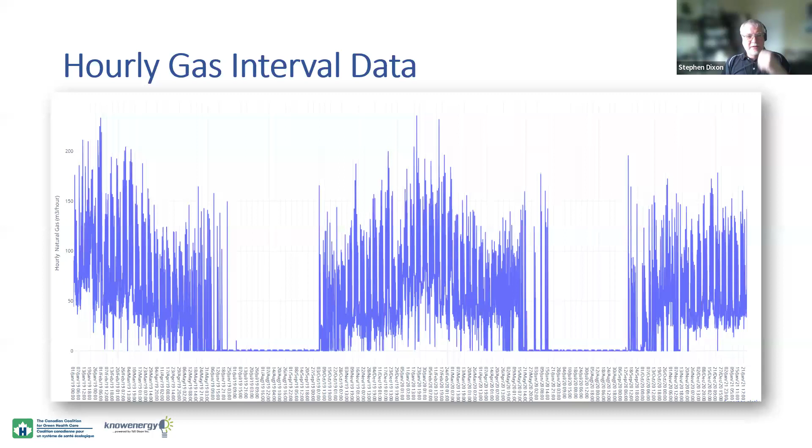So that takes us on to what we call portfolio analysis. In the portfolio analysis, we can take not just one building, either performance or feasibility or benchmark, we can take a whole collection of buildings and bring them together. And this is actually where Kate's going to take us in a few minutes. She's going to take us to her portfolio and show us what they've done in that portfolio.

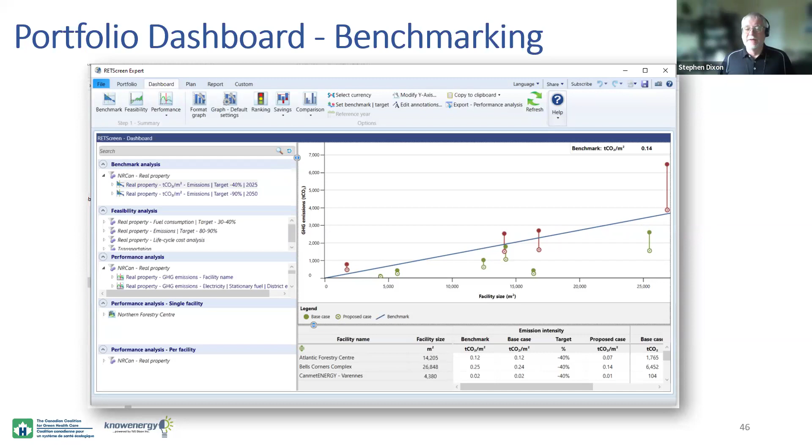So every one of those is an individual building. Underneath each of those dots is a feasibility analysis, and the red dot, the solid one, is the base case, right? The hollow dot is the proposed case. So basically what I looked at earlier on, base and proposed case, the way it is, the way we want it to be, that can be all summarized out here at a portfolio level for multiple buildings. Now, some of you may only have one building, so it's really maybe not relevant.

But there's also a custom dashboard feature here where we can use this to report out in a very customized fashion. So you can build a dashboard with multiple pages and books, in fact, with all the different graphs that you might have within the software. And there are a lot of graphs. I'm not going to go into it right now, but there's just a ton of graphs. And again, e-learning video, let's see how we do this. Click on that and we go to, I think it's a 20-minute video on how to use the custom dashboard feature within RETScreen. So lots of support to be able to do this.

If you've got data in Portfolio Manager, right? You click one button on the front screen of Portfolio Manager. It's on the left-hand side. It says, export my entire portfolio to a spreadsheet. You click that. You take that spreadsheet. You go to RETScreen. You go and say, I want to create a new portfolio. It says Portfolio Manager button. You click that. RETScreen says, where's your file from Portfolio Manager? Where do you want me to put the result? And how do you want me to deal with dates? That's 3 questions. You answer them. And the next thing you know, all your data is in the portfolio tool within RETScreen, and you can go straight to things like benchmarking right away.

Even more importantly, once you get the data in there, Portfolio Manager looks at your data on a year-over-year basis largely. You do get the graphs of the monthly consumption, but RETScreen has that amazing performance analysis facility where you can take that monthly data and dig even deeper with analytics. And that's what Kate is going to talk to us about right now.

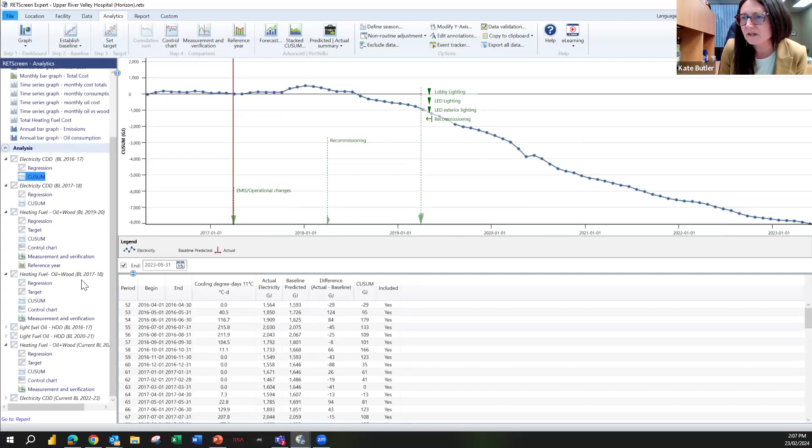So I'm going to get started with, I think this one here. So you can see, there it is. What came to light was that we had a lot of systems at Upper River Valley Hospital in manual. So the first thing we looked at was maybe we could do a recommissioning project.

So we did do a recommissioning project, and this is what you call the CUSUM. So the first thing when you do the CUSUM is you have your regression analysis, which for us regressed quite nicely. It was 0.8185. We took our baseline year as 2017, 2018, prior to doing the recommissioning process.

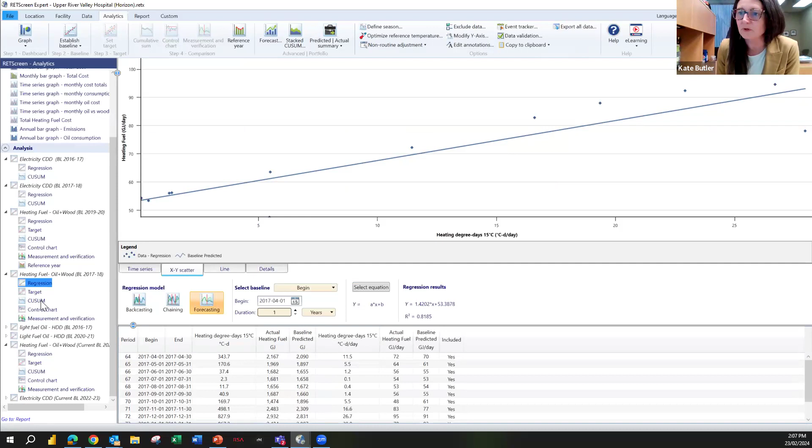And you can see this is our baseline year, and it's quite flat, which is what you expect to see. And then the CUSUM, what you always want to see is this downward. And the downward means that you're actually reducing your energy. So we completed our recommissioning process in the early spring of 2018, and we immediately started to see a decline in our energy consumption. This just says oil and wood. The wood did not come online until 2022. So it's basically our heating fuel CUSUM. So we did see that coming down.

What you quickly notice for your healthcare professionals is that we did see a reduction. Not only did it flat line, it started to actually increase a bit in early 2020. So we can pinpoint the date. I think it was February 16th, 2020, Upper River Valley went into 24/7 fresh air mode. That was the immediate reaction to worries and uncertainty about COVID, much earlier than most of the public is aware. And we started to see that increase.

Once we started to see that increase and we started to get a better idea of infection prevention control and how to operate, isolation rooms were put in place so that we weren't implementing these measures hospital-wide 24/7 with 100% fresh air. We started to see that decline again, and it came back online.

So the other thing that we recognize in Upper River Valley Hospital is that they were an oil hospital. So their physical plant, they had 3 oil boilers, and that's how we produce our steam, sterilization, hot water, heating systems at that hospital. So we had also taken quite a few years to develop a study, and moving forward, how are we going to remove that oil from the site? And at the end of the day, we actually had a pellet boiler installed. And it was commissioned in December 2022, and that biomass boiler started up.

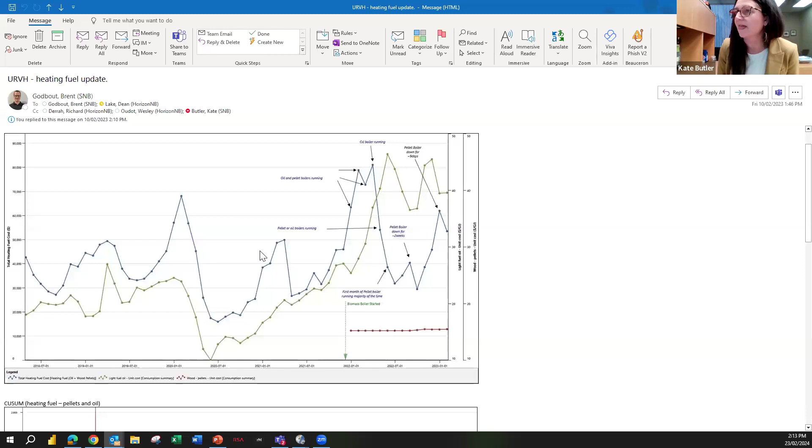So it gave them enough information so that the chief engineer and the building operators could go into the system and start looking at the oil boiler. And when you put things in perspective like this, you actually tend to get action because they want that feedback. They want to know that we've invested in this pellet boiler and we're actually making the best of it that we can.

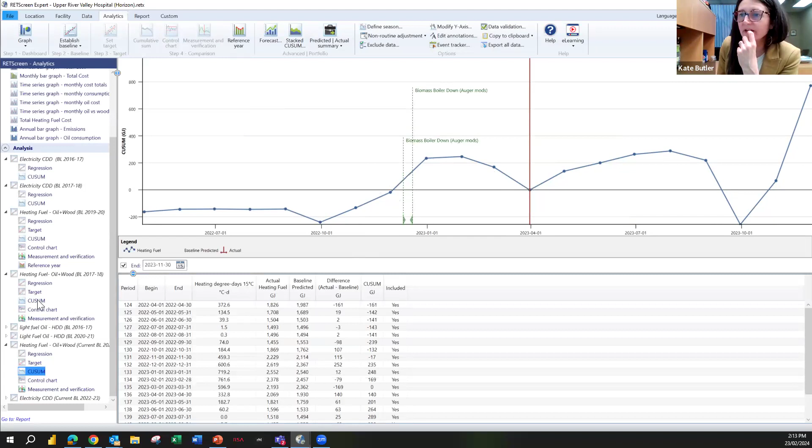So interestingly enough, what else came out of this action was the fact that we had done that recommissioning project. Oh, here's just another one where we just re-baseline it so you can actually see the actual impact of the auger. We had done that recommissioning project, then we brought the pellet boiler back on, but we're not getting the same angle on the line of the decreasing. So you can see it's not as steep of a line anymore.

So we would have expected there's a little bit of trade-off, recognizing that your pellet boiler is not as efficient, and that you've got a different type of fuel, so we're going to lose a little bit of steepness, but we thought we're not as steep as we'd like to be. We would like to somehow come back to this type of steepness.

So we have just started another recommissioning project because we're able to use this data to say we can do better. And so we are actually just going back to the recommissioning project, and we're going to start from scratch again using in-house to see what we've seen slip historically. So that's been really beneficial to us.

And I think, aside from the fact that there's so much power in RETScreen and it can have many different uses that Stephen showed you today, actually just looking at your site on a monthly basis, there's so much valuable information that you can feed back to the sites that allow them to analyze that data and take some action.

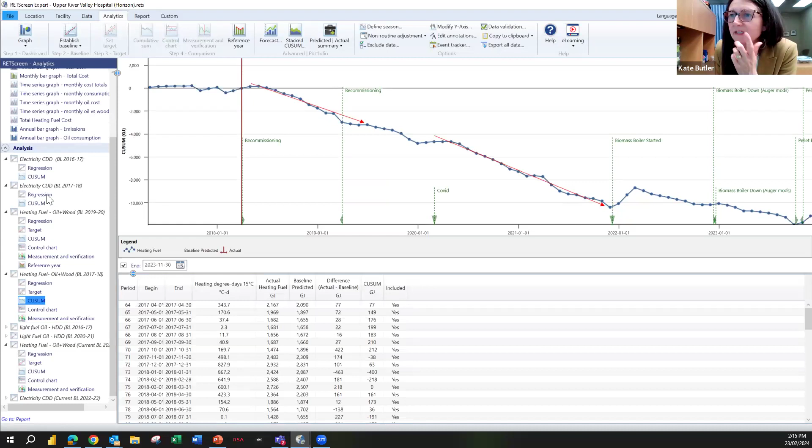Okay, you actually showed me an electricity one where the slope is starting to taper gradually. Yes. So that's probably this one. There it is. This is actually a really good one for the recommissioning because it's just the electricity. So when you did the recommissioning, you can see it turned down a couple of instances steeper. You saw the impact of COVID, but now you're starting to see it taper off, right?

Yeah, exactly. So we often get the question, how often do you do recommissioning? Well, you can use this to determine the return for doing it at some point. But once it goes flat, you're basically back to the way you were. And the electricity is pretty flat. Yeah. Right.

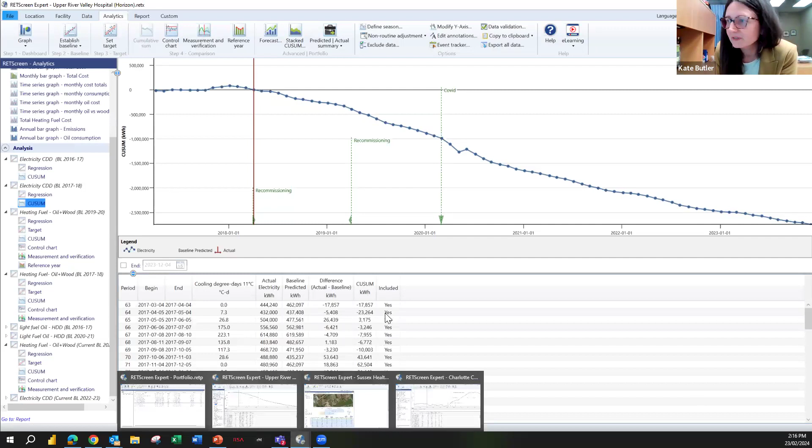Yeah, it's amazing how a CUSUM, or being visual, can actually build a case for you almost instantly. And that's what this one does for us, for sure. Yeah, I had one person, a CFO, once describe the CUSUM as an indisputable visual of the results. And another person described it as standing there waving at you, saying, look at me, look at me.

It's true. I don't know how much time I have, so I'm going to jump over to another healthcare facility. It's Charlotte County Hospital. It's a small site, 87,000 square feet. And what I really wanted to show you was this piece right here.

So there were a couple of issues happening at Charlotte County Hospital, but with the information we were putting out there, we got a lot of engagement with their staff. They understood the information we were sending them beyond Portfolio Manager, and had access to CUSUMs and information quicker, instead of the 12-month annual data. They can see it month to month. They can see the weather normalization.

What we started to see last summer, it was a very humid and very hot spring in St. Stephen, temperatures and humidity like we've never seen before. But this is weather normalized, and we started to see an increase. And because we were putting this information out there and asking the questions, one of the building operators took it upon herself to start going into the system.

What she saw was that there was a lot of cooling being called for at night, more than she would have expected, more than during the day. So that was the first flag for her. When she was on night shift, she started walking around the hospital to see what was going on. She noticed that in many nursing units at the station, the windows were all open at night. She asked why, and they said, well, we're freezing.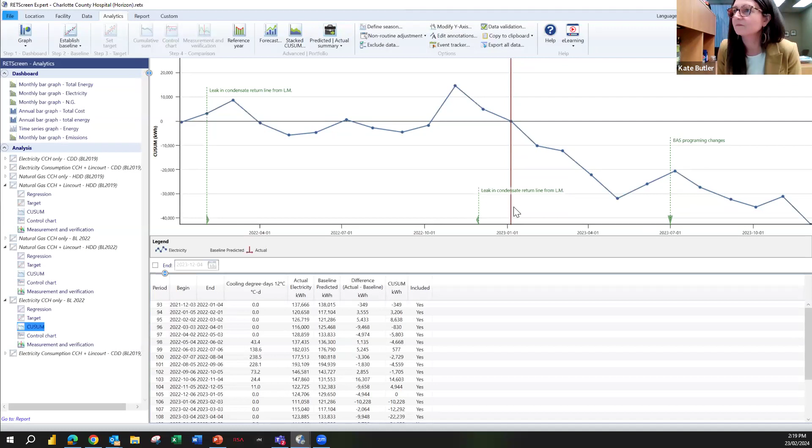Looking at the labels or the events over here, it's the leak in the condensate line. Once that got fixed, you headed downwards, right? Then you had the blip because of the cooling, headed downwards, another blip, but now you're on that downward trend at the end. If we can take out that blip, we've got a pretty good line going here. Everything's going down. And the line stats are really important: the slope of that line, how long that line's been moving for.

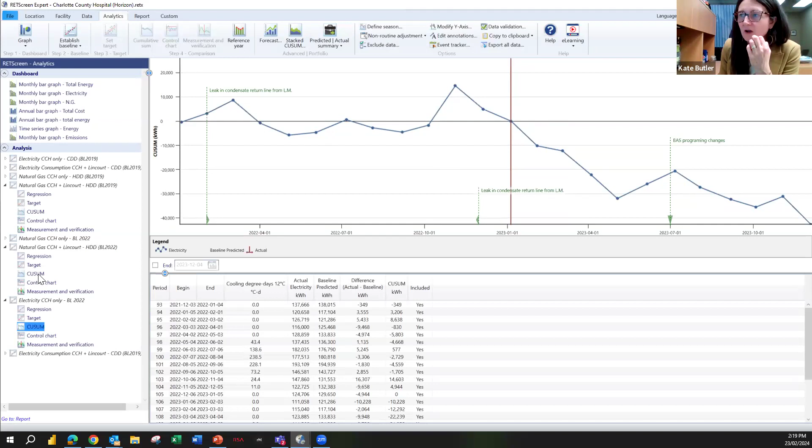It's the CUSUM that really notified our energy manager of the issue with the condensate. We had a really good regression, a little bit of a decrease, and then we saw this huge increase. At first they thought the pumps were down, then they realized there was a leak. And we had to wait until spring, because they had to dig up the soil to get at the leak in the condensate line.

This site provides steam to an adjacent nursing home, and that's where the condensate wasn't coming back. The pump was broken, and then there was a leak, and we could see this really increase. It's a small scale, 0 gigajoules, 500, 1,000. I don't know how well you can see that on your screen, but that's quite the incline. We're on our way back down, but that's still $15,000 at $10 a gigajoule, so that's not insignificant.

And we're at about $18, $19 a gigajoule for natural gas. RETScreen can even see underground leaks. Yeah, it can sense underground leaks if you know how to use it, right?

Yeah, X-ray vision. And in the whole scheme of things, when you see it in Portfolio Manager and it's 1 or 2%, you don't even realize that is something you should be investigating. When you put it in this type of a format with the CUSUM and you see it almost instantly going up, any up needs to be investigated for sure.

And that's been the power for us, and how we're going to continue to use this tool to engage and take action quicker. So you can analyze that information a lot quicker than you can with Portfolio Manager. Portfolio Manager has its place, absolutely, and we make very good use of it, encouraging staff to take their Energy Star score and continue to make it better. But when you start looking at these larger, more comprehensive sites with a lot of diverse uses, different systems, RETScreen is the tool that you need to use to make a difference.

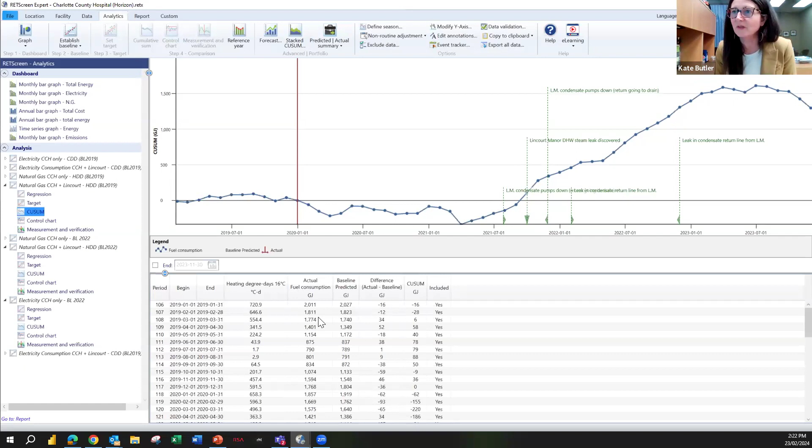And I can't express enough how powerful the CUSUM is. Graphics every single day will tell a story rather than me talking. The other thing I was going to show you is that we can take all this data and make reports. Brent has some cost data in here, so he's got an annual bar graph, so you can see the cost over the years. It doesn't necessarily take into account some of the rate increases we've seen, but you can pull all that together graphically however you want and need it. The slicing and dicing power of it is astronomical.

And again, I don't even know how powerful this tool is, because I still just stick to the basics of it. And our energy managers, we've got Brent for Horizon and now Nick for Vitalite. They're going to learn to use this even more and keep adding their abilities to make this a powerful tool for sure.

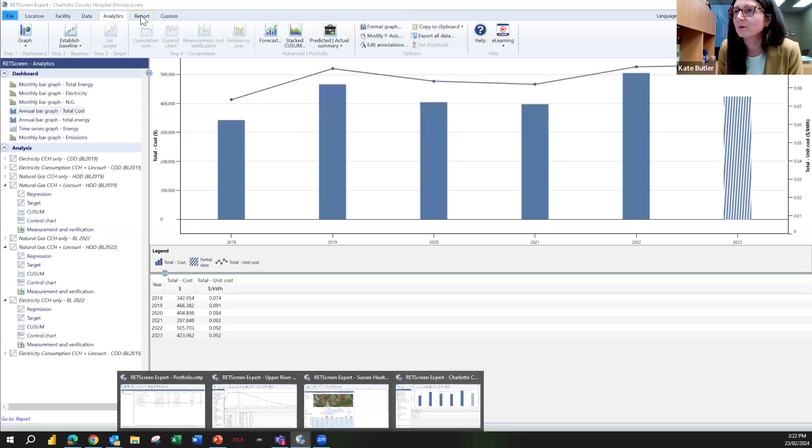Oh, that's wonderful. Do you have one more quick one? I think you wanted me to show... Well, yeah, actually, if you go to the portfolio and go to the dashboard. That's the dashboard. So here's what I'm talking about, slicing and dicing and rolling it all up.

So when you have multiple sites, at any given time, based on what your need is, you can create your performance analysis and show it per site. So here, since 2012, 2013, the red is Saint John Regional Hospital. That's our largest hospital, so it makes sense that it's a huge chunk of the pie, but you can actually see where all your emissions are coming from. And whatever you can dream of for a dashboard, you can make happen. Exactly, and you can put this into a kiosk, put it in an elevator too. I've seen people do that.

And actually, one neat feature here is that it's detected at the portfolio view that one of your files underneath has changed. So if you click the little refresh button on the toolbar at the top there, it'll go out and check the data and update the reports for you, so your reports don't get out of date. So it's kind of watching things for you. There you go.

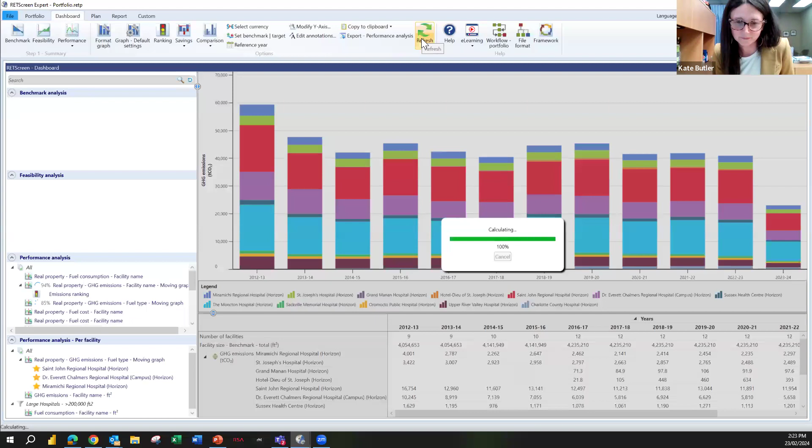And I know that some of the provinces have reporting policies and mandates for their healthcare facilities. We don't have that type of mandate, but we do it anyway. So we have an annual report and we pull this type of information right out of RETScreen. It makes our life so much easier than having Excel files that you need to update, where there's a little bit of hesitation about the quality of the data. They're so easy to make changes to, and errors. RETScreen, it's quality data, it's consistent and validated data, and it has a little more credibility.

So that was amazing, Kate, thank you very much. For somebody that didn't use it all the time, you did a great job. Thank you, I really appreciate that. And I always say every building, every facility needs a CUSUM, and you clearly validated that. I can present the theory, but you're presenting the real practice. So you'll need to stop sharing so I can wrap us up here.

There we go. So, all right. Thanks, Kate. Feel free to leave your camera on if you want. There we go. Okay, everybody can see that, right? Yeah, I think so. Just there. Yeah. Okay, good. So thanks again for that.

As part of the portfolio analysis tool in RETScreen, there's also a new feature called the Net Zero Planner. And this kind of brings together the idea of multiple buildings, a portfolio, with the idea of the archetypes, which can either be low carbon or low energy or both. Right. So the Net Zero Planner allows you to assemble a portfolio of archetypical buildings, and then specify some decision-making points

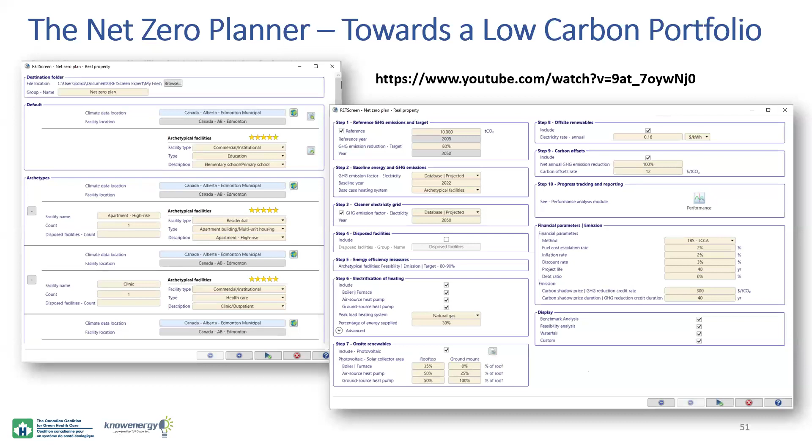So there's lots of features we can use here to really tailor a portfolio to a specific purpose, and then to develop a net zero plan. So here we see the portfolio of buildings, which are built out of those archetypes. And here we see the net zero plan in summary, which says, okay, we start out here, we bring in 2005, we bring that to 2022, right?

Then we look at a greening of the electricity grid, if that's one of our options, accepting that that could happen, right? Then we have energy efficiency measures in the building, which reduce carbon. That's a big one, right? Those energy efficiency measures. In this case, the electrification of the heating system is actually small compared to what efficiency can contribute.

But it's only when you use a tool like RETScreen where you'll be able to look at that upfront and determine what are the right actions for you to take. You know, on-site renewables, off-site renewables, and carbon offsets to get yourself to net zero.

So if you want more information about that, if you remember, I showed you there's a video, right? So you can go to RETScreen's YouTube channel, and one of the first videos on the channel right now is Kevin Bork talking about the net zero plan in RETScreen. It's about an hour and a half. You can start and stop it. You can follow him through the examples in there.

So just to finish off, I think we made the case pretty good. Kate, you definitely made the case that everybody needs a CUSUM, because you're not going to be able to see with other tools the kinds of things that the analytics in RETScreen, the CUSUM specifically, allows you to see. But there's many things you can do in RETScreen, right? We haven't even touched on what we can do with the feasibility. You've just focused on the performance piece, which is great, but there are lots of other bits and pieces in there as well.

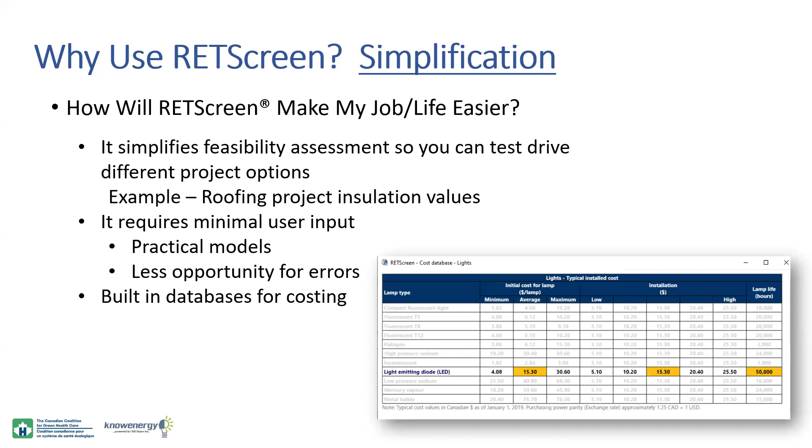Years ago, I did a seminar with JJ Knott, who many of you probably know. And he said, well, what are the reasons I should use RETScreen? Well, simplification, right? All the databases and costs and the things that are in there, it simplifies getting to it. One of the developers years ago of RETScreen said it's one step better than the back of an envelope calculation, maybe 2 or 3 steps better, right? And ultimately that's what we want here, a tool that's going to help us take those first few steps and really be able to make better decisions.

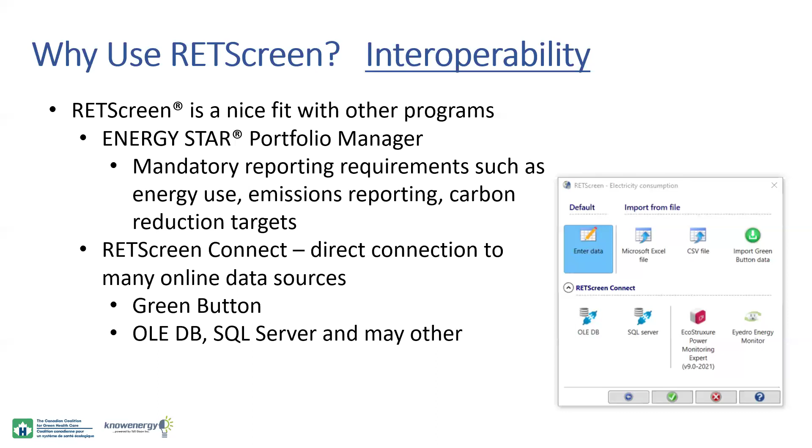Interoperability, the fact that RETScreen now connects to many different sources of information. You did a great job of showing how it connects Portfolio Manager. I use it for my house, but there are many other ways to connect RETScreen now to get data into it to make it easier, right? Ultimately, I spend a lot of time getting data into tools, but it's getting easier and easier with RETScreen these days.

So finally, everyone here who hasn't got a license will receive a 30-day license. Until you receive it, just go download RETScreen right now and start to play with it. Get the license, you'll have it fully blown for 30 days, and you can make the purchase decision beyond that.